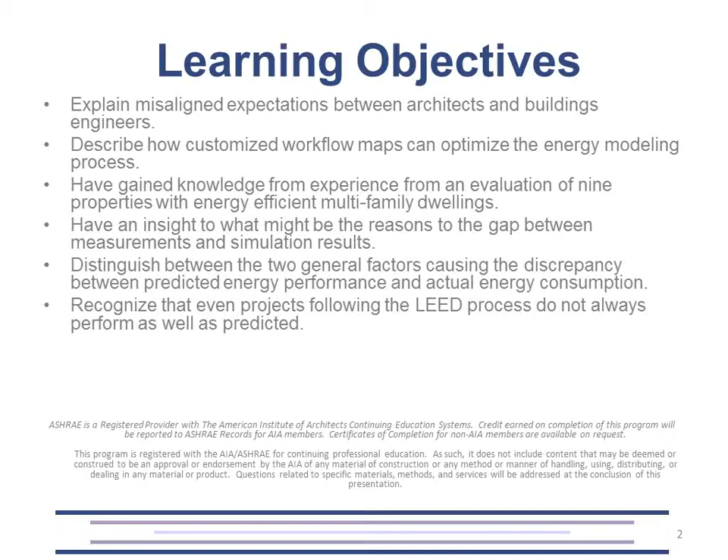I'd like to condense all these objectives into two basic parts. While we want to gain an understanding of why models don't necessarily match predicted or actual performance, I want to spend most of our time discussing how do we change that. What can we do to ensure that our buildings do in fact measure up to what we predict?

I'd like to acknowledge Leslie Bew and Tom Reed, if you can raise your hands, as the co-authors of this project. Most of my experience has been on the new construction side of the business, whereas most of theirs comes from the existing building stock. So we got to assess this throughout, looking at it from a whole building life cycle approach.

So here's our agenda. We just want to touch on whether or not we think sustainability is here to stay, look at prediction accuracy in practice, look over the common approaches both from a new construction side as well as an existing building side, and then really focus in on what are those barriers that prevent us from having great prediction accuracy.

Okay, we don't have time to go into all of these, but essentially if we focus on air quality, the long and short of it is we have a lot of data and studies that show things related to air quality. The economic benefits of efficiency and climate change are really increasing to the point where we don't anticipate this sustainability movement going backwards, which may be in stark contrast to for those of us who lived through the energy crisis of the 70s as an example.

Looking at it from an air quality perspective, the bottom line is 142 million Americans experience dangerous levels of air quality in the U.S. alone at some point during the year. And if you look at alternate studies from the World Health Organization, they estimate about 1.3 million people die annually as a direct result of poor air quality, largely from the byproducts of fossil fuel combustion.

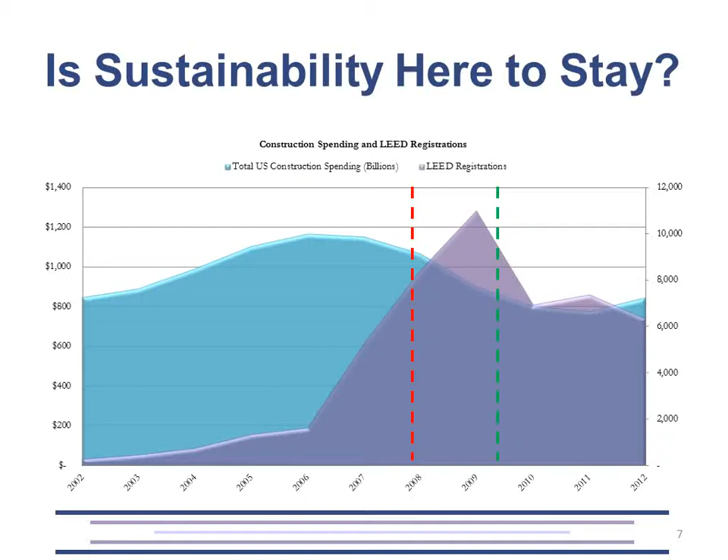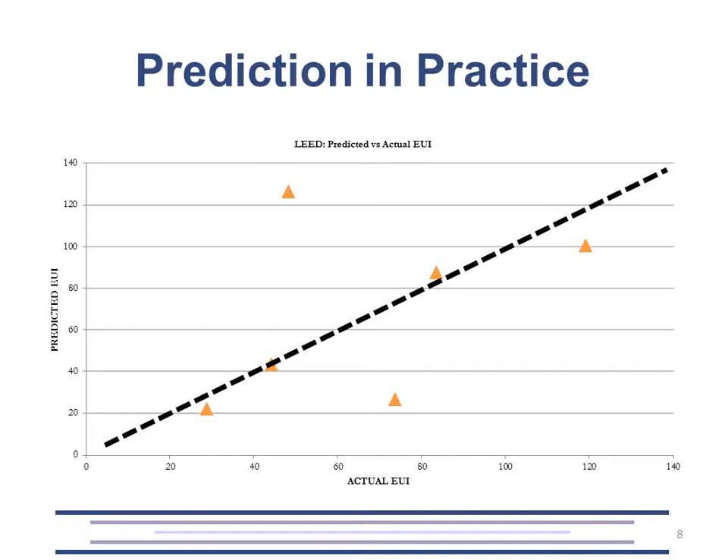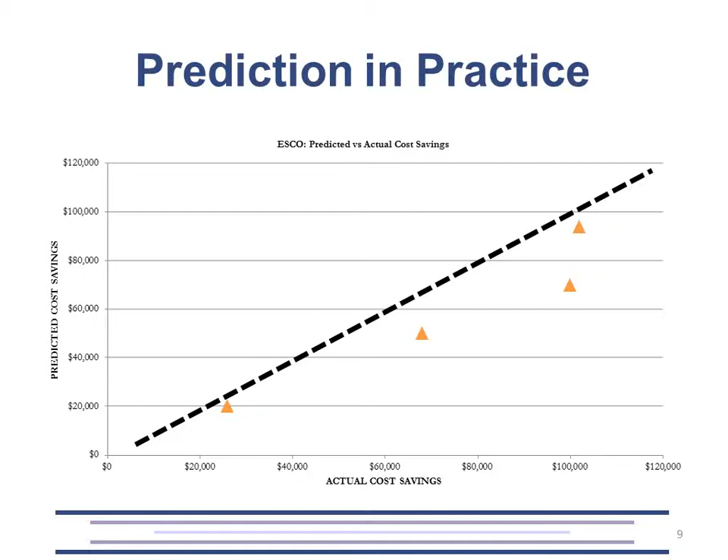We're going to compare this to an existing building process, using slightly different metrics, looking at cost in this example. The takeaway here is that we have no data points above the line, which would basically say that we don't have energy projects that were implemented but are not achieving the cost savings that were projected or promised. So from an existing building approach, we're really good at making sure we're erring on the conservative side of things, and our scatter does not typically exceed what we predict.

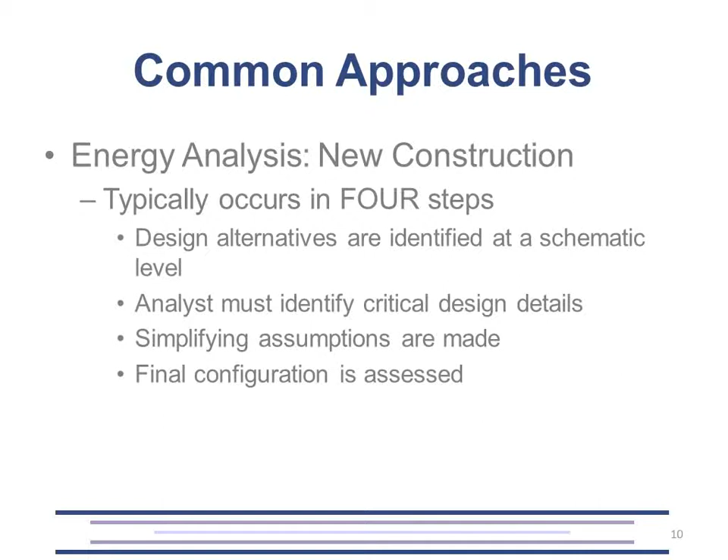So we decided to dive in. What are the different approaches or workflows that possibly lead to this? We'll go into this chart, it's a little better to look at.

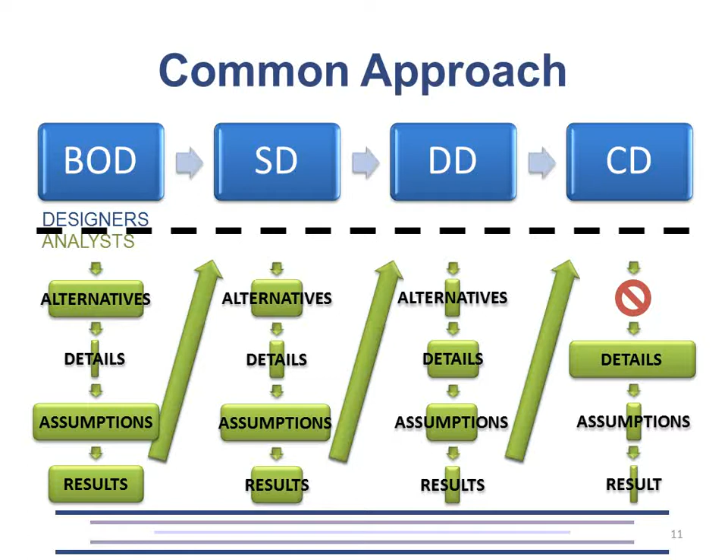We do this iteratively through each phase, so finally at the end, hopefully we have all the details we need. We're not looking at any more alternatives, and we're making very few, if any, assumptions, and we're getting the final answer. So let's say we're 20% better than code in our final configuration.

The existing building approach is a bit different, and it starts differently in that an energy concept is sold to a prospective client. Once that concept is sold, an analyst will come in and really put numbers to it.

At this point the analyst takes over, going in and finding the details needed to complete the analysis, making some assumptions, but coming up with results. Then you go back to the building owner and present them with an array of options, and the building owner has to decide which of these options makes most sense and meets their goal.

Maybe it's carbon emission reductions if you're looking at a company like Google, or maybe it's purely ROI. But this process may iterate several times before something is finalized.

Those decisions are translated to a designer in a spec requirement, for example, and the designers then have to make sure they design something consistent with what the analyst is dictating and consistent with the owner's goals. Perhaps the biggest difference between the existing building process and the new construction process is this results and verification component.

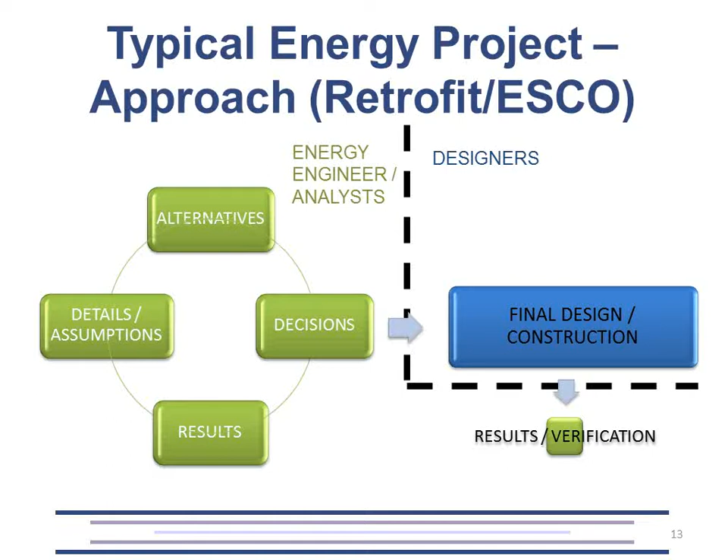If you have an analysis firm on the existing building side, they have much more of a vested interest in ensuring that what they predict is actually delivered. So you have this feedback loop that usually does not occur on the new construction side.

So what are the common pitfalls experienced from both new construction or an existing building process? Since this is focused on the analysis end, we'll fully acknowledge that underqualified team members can exist in any stakeholder group, be it owners who aren't focused on efficiency, or designers who aren't versed in the strategies being applied, but we'll focus on analysts for this discussion.

You can always have a lack of design detail that allows installations to go in perhaps not as intended, and we're not helping ourselves by not going back through and verifying our installations with red lines. We can't expect commissioning agents to catch all of the errors that may occur.

Communication breakdown is often a big problem, and what we're referring to specifically is when things change at the design level or even in the field that don't get conveyed back to the analyst to incorporate into the analysis. This can often happen even in the value engineering process, where the final model has perhaps already been submitted to either code authorities or the owner, and changes still get made after the fact.

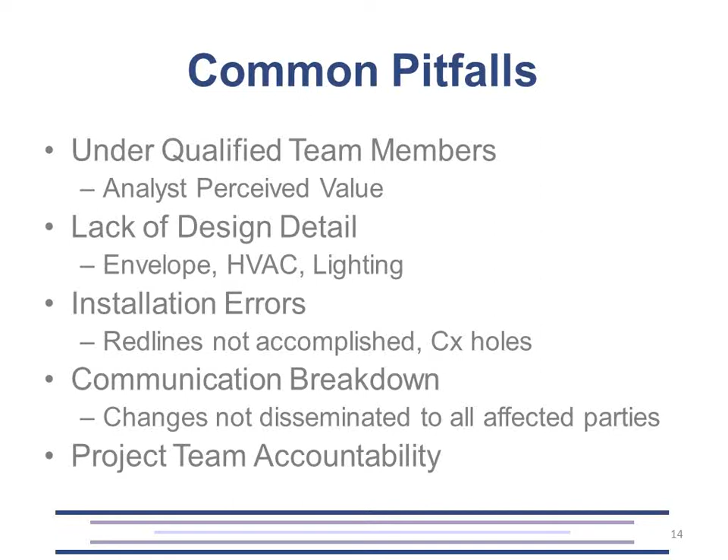Project team accountability is more applicable to the design process rather than the existing building process. What that speaks to is essentially, we as designers issue our drawings and then we're done, we move on to the next project. It goes back to that vested interest idea - we're not often held accountable for things that may lead to poor performance after the building's been turned over.

So how can we correct this? Underqualified team members, again focusing on the analyst: what we're recommending is that when choosing an analyst, we can take some notes out of the LEED book. Basically, we're advocating that your analyst should have at least 2 projects of similar scope in their back pocket to refer to, focusing more on system complexity rather than building area as an example.

The firm should have a documented QC process that includes at least 1 peer review, just as a matter of good practice. If they don't have this, that's an indication that perhaps analysis is not really the focal point of this particular group. No dual hat simply means we don't want our designers also having the responsibility of analysis - obviously there's a conflict of interest there.

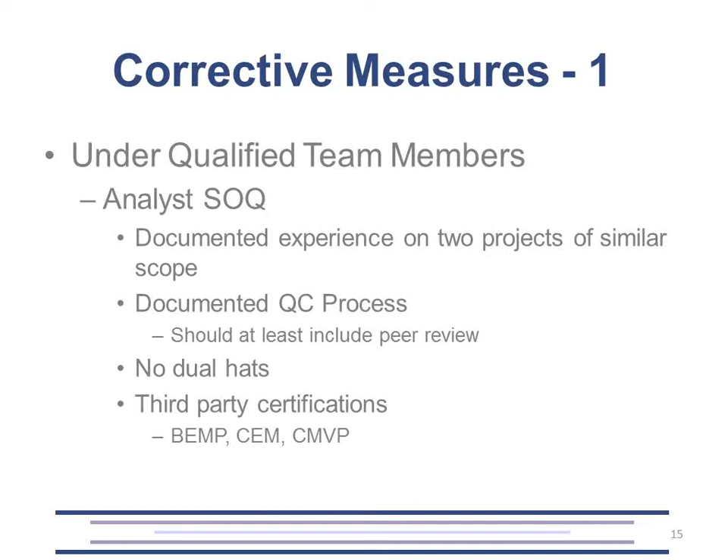And then we have a number of third-party certifications that are indicators of basically what we know in the field.

So corrective measure 2, integrated design and operations - we basically identified 5 keys. Keeping the analyst in the loop we discussed, making sure those design changes are fed to that consultant. One big one is positive confirmation of your sequence of operations.

We think it's a good idea to make sure your analysts are pairing up with your engineers and discussing control sequences in a positive manner as early in the design phase as possible, because what we've seen over and over when we looked at a lot of case studies was that the controls are either absent in the worst case scenario, or they're generic, meaning they may not apply to the systems that were installed.

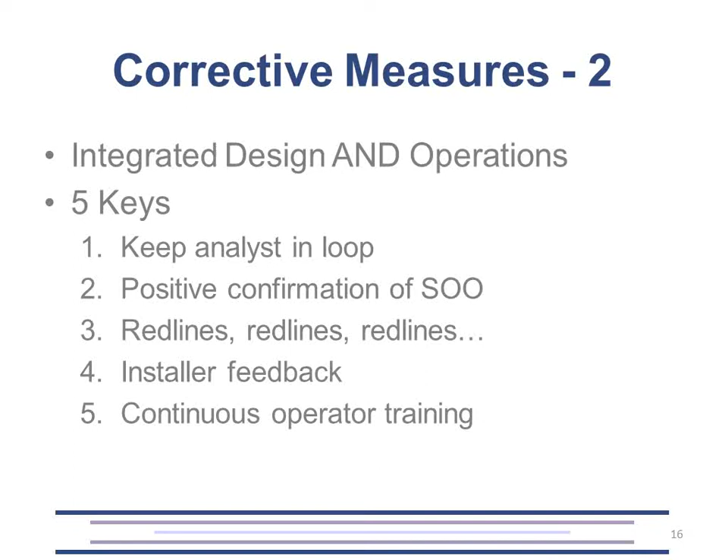And so red lines, we need to be doing those. Installer feedback - we need to make sure we're having an open line with installers, so if they have questions, they feel like they can come to us to make those changes. And on the operator side of the equation, we need to make sure operators have the training they need to run the equipment we've specified.

Building commissioning is mandatory. It's an extra layer of QC, and we're not going to belabor that point.

Smart M&V. A lot of times M&V will get value engineered out of the project, and one thing we can do is ensure we're advocating for it and basically highlight the risk.

We can go back to that first chart I mentioned and see how much that data point deviates from the line, and basically tout the fact that there's a cost involved with that, and that cost has a risk. So what we can do is use our analysts to identify what are those critical energy efficiency nodes and allocate our M&V resources accordingly, so that we're capturing at least those critical nodes.

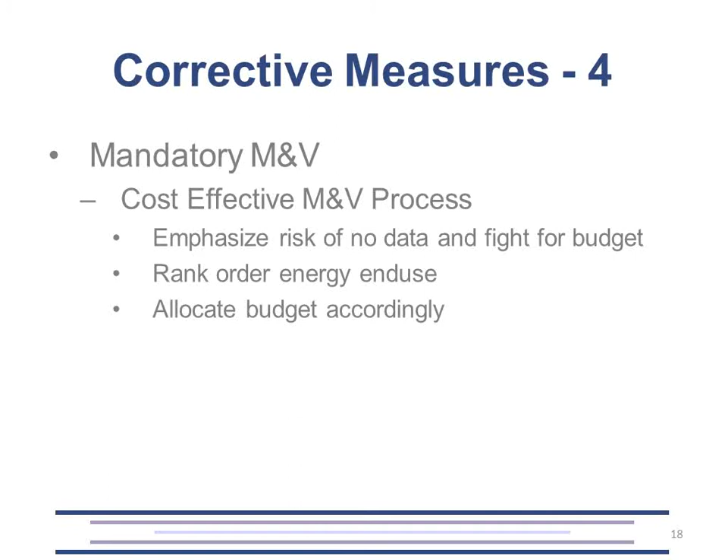And finally, this is more for the operator side, but we need to try to make sure we're pushing design teams and even facility owners, who we often have the opportunity to work with, that operator training is as important as all the emphasis that's put on design team members. If our operators don't have the skills necessary to operate this high-end equipment, they're going to override systems or controls, and you're going to lose performance gains that were built in.

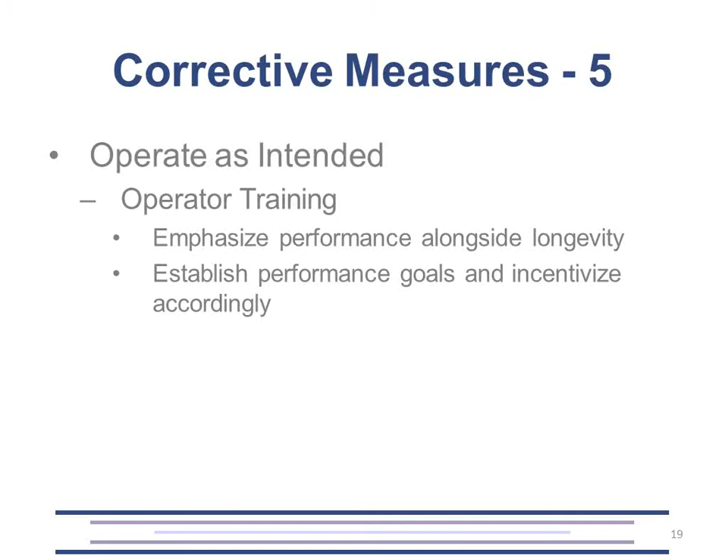So in conclusion, we just want to make sure we understand that mistakes can occur throughout the life cycle. There's no magic bullet that's going to fix everything, but with that, we can focus on ensuring our analysts are well qualified to perform the function they're doing. We can emphasize that building operations are equally as important as the design side.

We can push for building commissioning, and we can also push for appropriate use of M&V. And then finally, to reiterate, we want to make sure our operators are getting the support they need to operate our buildings as we've intended them to operate. That's it. Thanks.